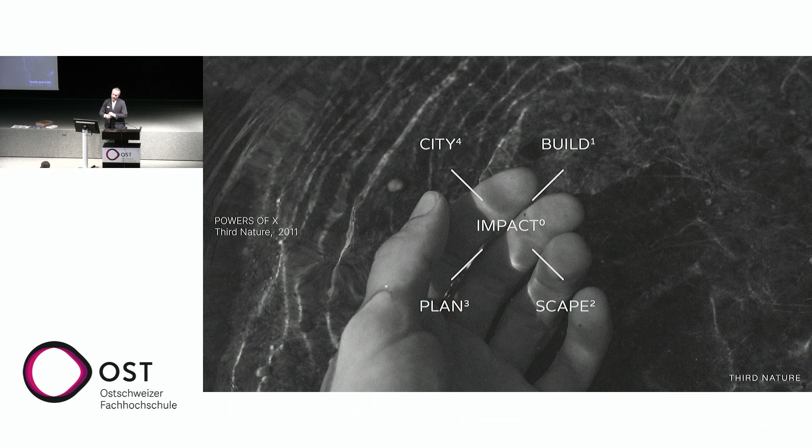This is what we work with in our office. We work with almost all scales of the urban realm, and try to take the prototypes of arbitrary projects, put them together, learn from each sector of work, and put it towards the middle to create more impact. That is our practice - this is the Powers of X, an ambition we founded in 2000, formulated in 2011, and have been fortunate to work with.

In 2011, we founded our office on this project, the Monster Rain event in Copenhagen: 90,000 individual insurance claims, close to 1 billion euros or Swiss currencies.

It was a very bad day for taxis obviously, infrastructure very expensive. But also if you look at the transformative power of this human-accelerated natural phenomenon of too much rain - look at the reflection on the water, all these people standing here gazing upon this phenomenon. Look at the guy who gets to skip work and take his daughter by the hand. So separating good from bad, I think, is very much the balance we try to work with, and the knife edge that we walk on.

If you look at cities traditionally, the classicist city was actually doing pretty well. This is City Hall - you have Tivoli to the right and City Hall to the left. Look at the two guys standing there. I'm going to try this thing just because it's so cool.

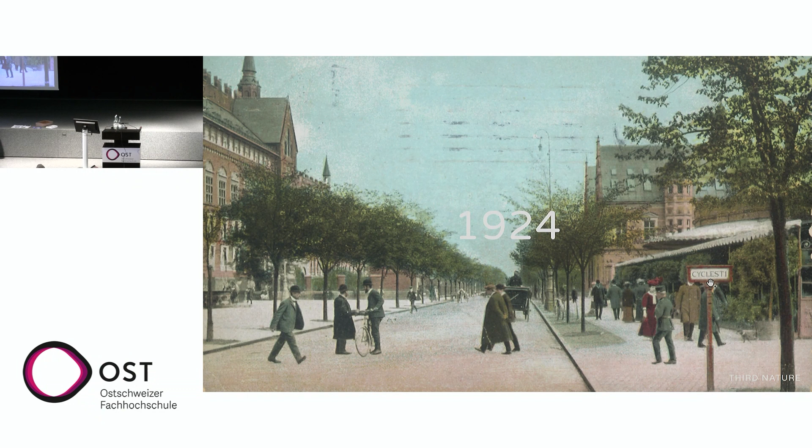Look at these two guys standing in the middle of the street, greeting each other. Here's a sign saying bicycle path. Obviously, this is like the epitome of a classicist livable city. And the exact same spot 100 years later is a complete decimation of all the livable parameters, but also the mobile parameters of this city, this particular place in Copenhagen.

And it's kind of like the guy in the car battling the guy with the bike, now being pedestrianized, just kill me, no, please kill me first. So obviously not a win-win situation anymore between city and nature and space and sort of the classicist traits of a good city. The socio-economic business case is horrible.

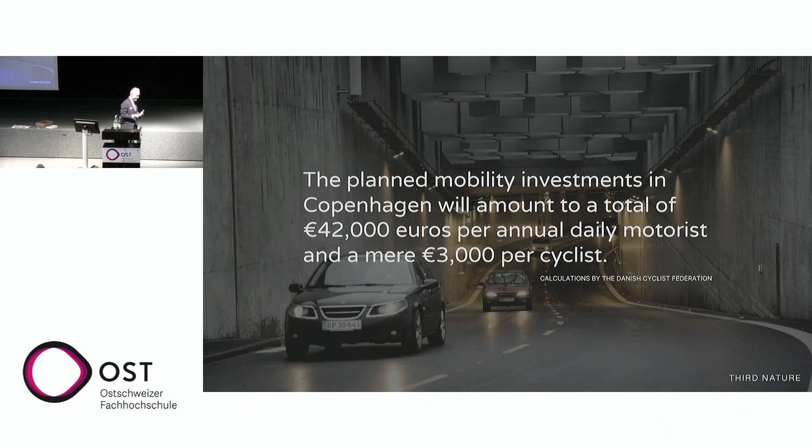We have all the arguments in the world for changing the city. If only facts were enough to change the world, we would be in a better place, as we often joke at the office. Currently, the situation is that we're investing 14 times as much public money into motorized infrastructure as we are into soft mobility. It's completely mindlessly stupid. But that's my personal, but also factual notion on this.

Cities are sticky. Cities are these kind of like metabolistic, strange, artificial sort of phenomenons of relations. And this is just, when Third Nature tried to look at all the data and put it together graphically, it creates this kind of like a Rorschach test of what is actually Copenhagen. It's not just infrastructure, it's not just plots to build on, it's not just the odd park, it's everything. Everything that sort of touches us, touch our life and ability to live.

And how do we look into this equation of strange relations? How do we actually, as planners, as architects, as landscape architects, try to come up with something that performs better than this kind of like mishmash of strange, arbitrary relations? It's so easy to find comfort in what we normally are doing and long-term investments, but we try to somehow, sometimes just, how about just doing a little test?

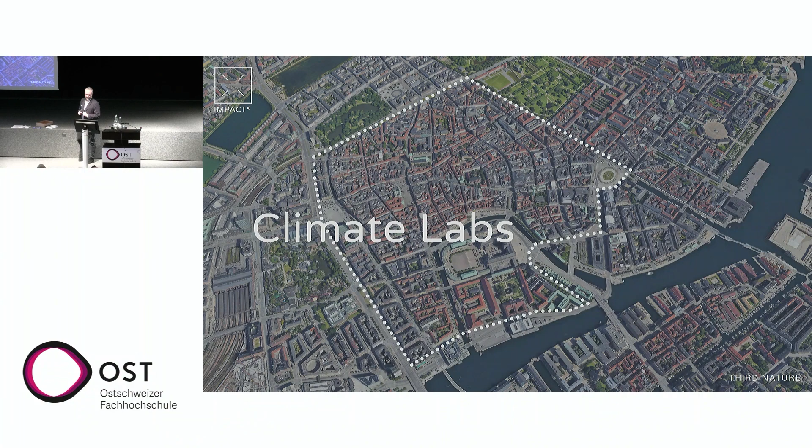This was a little test we did in the medieval city of Copenhagen, the center of Copenhagen. We said, well, how about, just for a summer, we take out a couple of cars, just a couple of parking spaces. I mean, mind you, this city was built 200, 300 years ago. No cars at that time. It's actually okay to try it out.

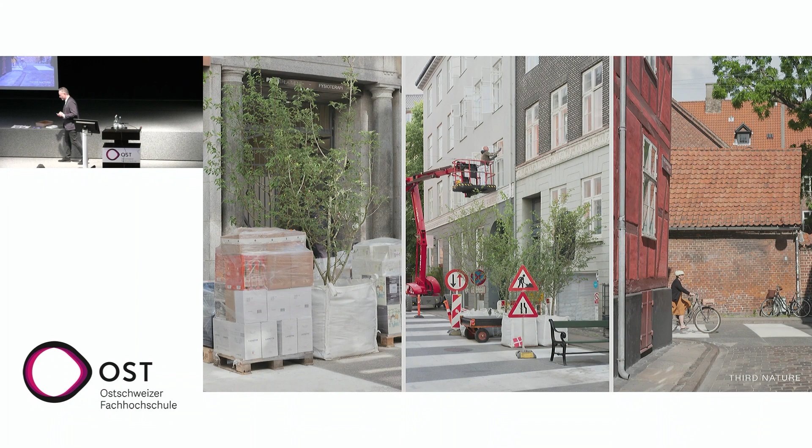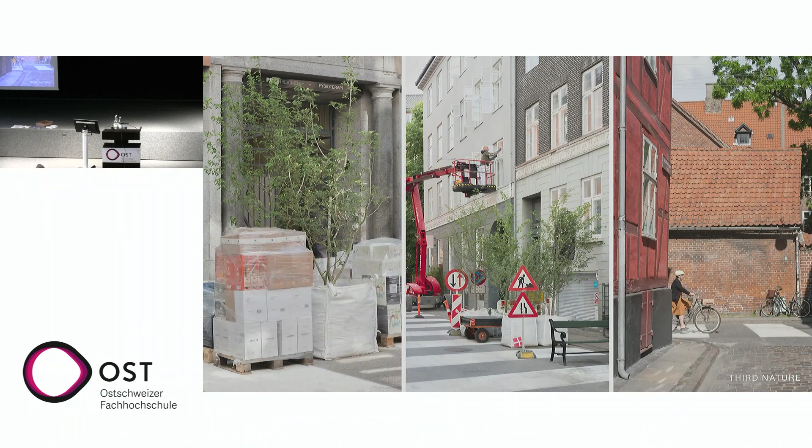So we did, I don't know if you know Lars von Trier, the Danish director, he did this film called Dogville, which is kind of like a theatrical set, you know, the sort of the Beatles cover, obviously. So we did that. So we took out a couple of kilometers of Copenhagen and said, well, how about we just painted something on it to simulate pedestrianization or public space, and then we used some of the parking spots for trees. A very simple project.

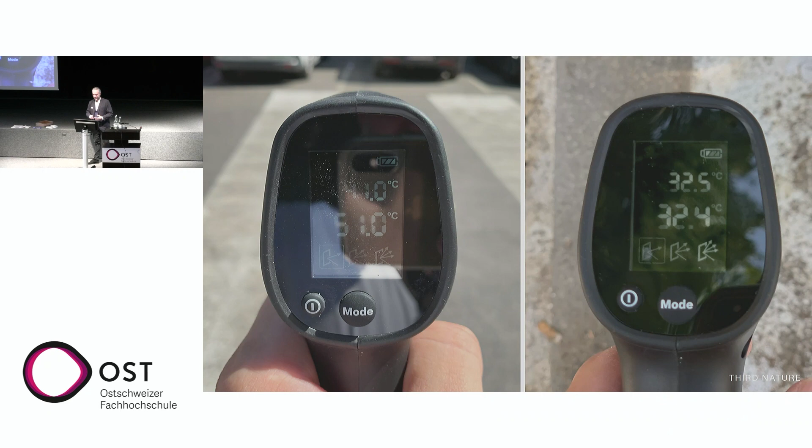I was just one summer, a couple of years ago, measuring it. We had like 20 centigrades of temperature difference from an unshaded dark asphalt surface towards the more white one, which was in shade. So the sort of environmental microclimatic comfort and impact of this simple thing was really, really profound.

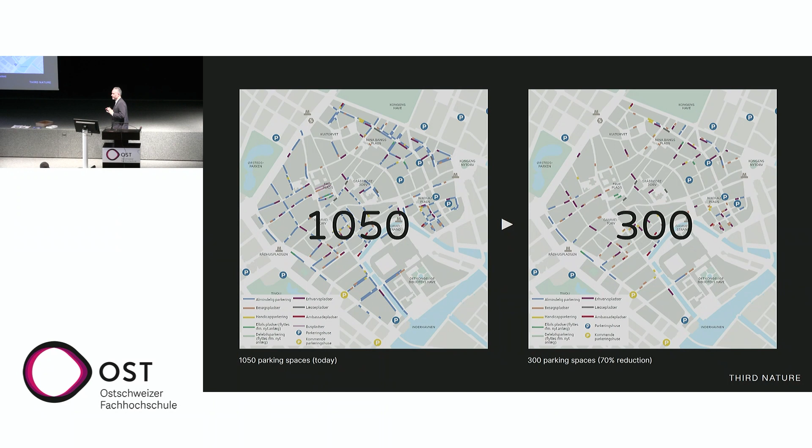And politically, now they have said, well, we're actually going to take away 70% of the parking spaces in this medieval core and try to use it for something else. Something that was completely unimaginable before discussing this particular location in Copenhagen. So I think just sometimes being simple, being a little stupid, but also just let's just try to see what happens actually is a way to go.

Just there is hope on the other side of the parking mafia and the car ownership mafia and the bike mafia and the pedestrianization mafia and the tree hugger mafia. We can all somehow get together and do something nicer that works better for everyone.

But the more permanent installations are also critical to look at. We spent 7 years on this project and realizing all the stuff that goes on underground is just as important as what we look at on the surface. We call it a plug and play project because the plugging does not really relate to the way that we get to play in the city.

We were just out of the first project we did, the climate district, we actually realized that 20% of the streets of Copenhagen does not have any function. If you put stuff together in a more pragmatic way, we actually have 20% of the entire streetscape of the public spaces and the public streets of Copenhagen does not have any dedicated function.

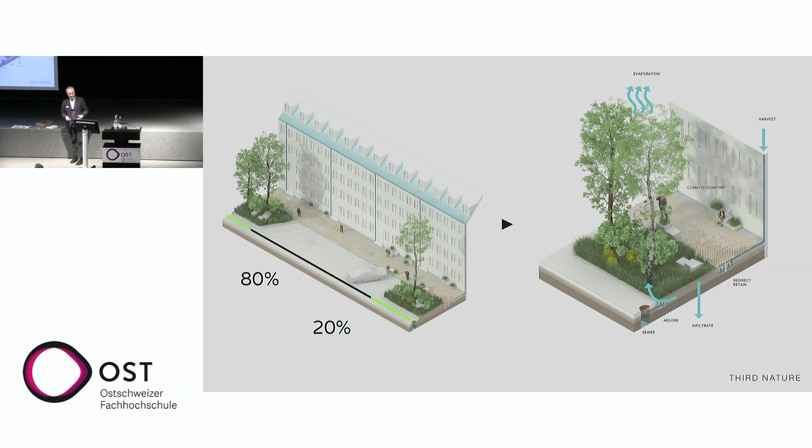This is the concept. The problem fundamentally with flooding in cities is that paving does not do anything with water other than push it away, so it doesn't get into the buildings. But once the sewer system is exhausted—and we have sewers all the way back to the cholera epidemic, still in function in Copenhagen—here, 100 and some years later, they are maxed out in capacity. So now we see water coming on the surface.

So this surface in itself can actually help to provide an additional water management system. And people tell us how much water they need to manage, and we tell them how many trees they need.

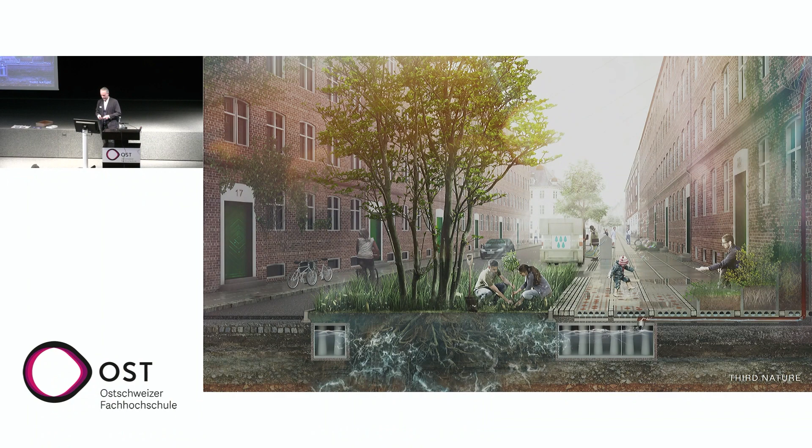So we use our product to accelerate the greenification or naturalization of the streets, to promote more and better streets, more green and more social, high-capacity streets. This is the average street of Copenhagen. This is where we actually spend 80% of our daily free time, and it's basically a parking lot.

We'd like to think that I'd like to live centrally in Copenhagen, next to the Royal Theatre and these kind of things, but I never go. I don't go to the Royal Park, I don't go to the Royal Theatre. This is actually the space I get to spend most of my hours, 3 hours, with my kids. Parking lots.

We call it the philosophy of the edge zone, and the edge zone is actually a formulated target of design when we do cities in Copenhagen. We spent 5 years designing this concept and this product. It took 5 hours to put in these trees.

And literally 5 minutes after we cut the ribbon of this product, people were just responding so positively to it. We had one person—I can see I'm never going to make all my slides because I'm just too anecdotal today, but that's okay. One person lives on the first floor, and suddenly her view was taken away by the big trees.

So I thought, she's going to be pissed because now she has no view. But she was actually a night nurse, so she came home that afternoon and just looked at it, and she was so happy. Normally she would have to go to bed because she had a job the next night, but she was just standing for hours on the balcony, super happy that her non-place of an environment had suddenly become some place, and she was really responding well to it.

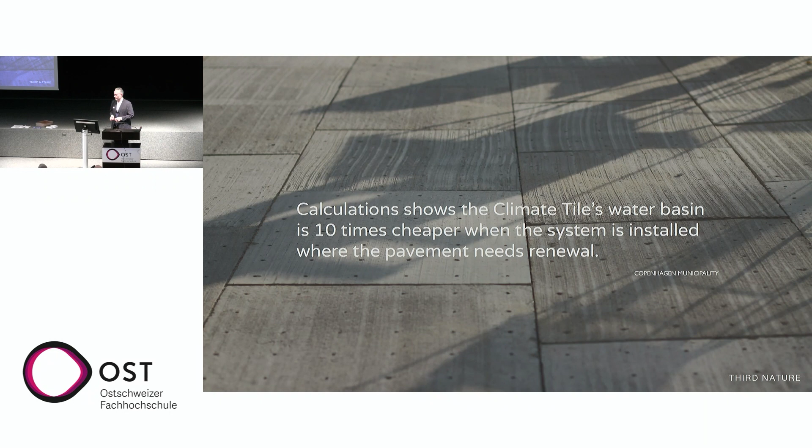Because all the other places are hypothetical, insanely expensive places that are not currently available in the denser cities, that's actually what we are looking at. If you work with simultaneous hybrid products like this, you can actually have a vast socioeconomic impact, and also make something useful over time.

This is when we are retrofitting, looking a little more at the permanent larger plans of Copenhagen. This is another district we've been working with for some years. It's a kilometer-long project, and this is much more extravagant in terms of livability. The edge zone design finds the balance between a hyper-public biking and promenading corridor throughout the heart of this project, with privatized row house ownership on the ground floor.

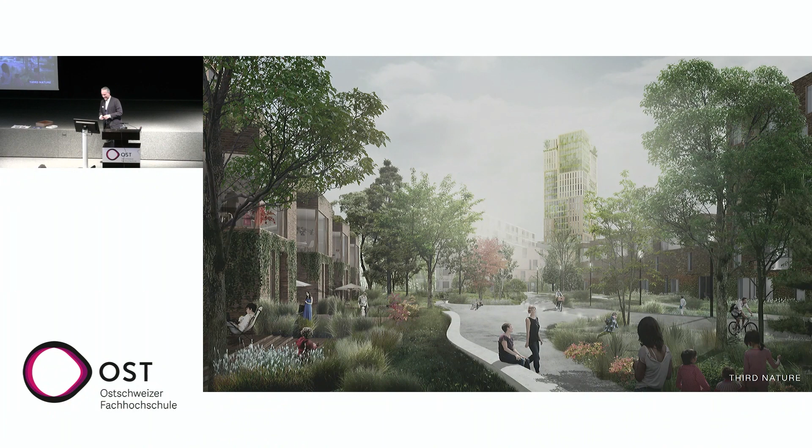By using landscape and meandering the different levels and densities of plantation, we create something that plays nice, so you can live here but also have this super public situation. And magically, we disappeared the cars in this project by having a basement underneath everything - more than 1 kilometer of basement for just cars. But you get a sense of actually living in a car-free city.

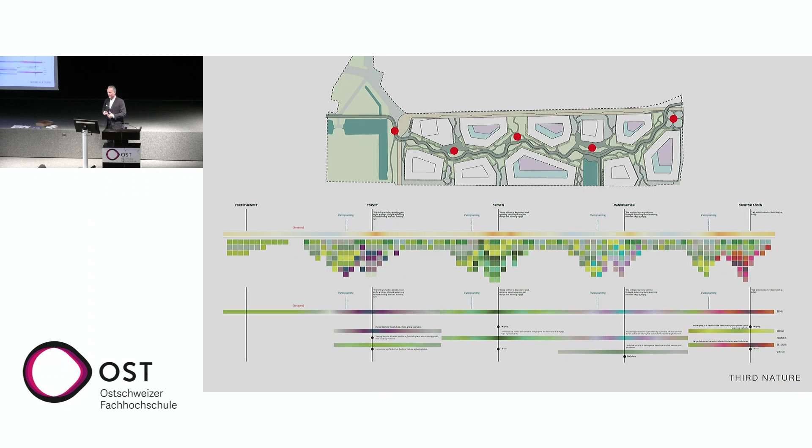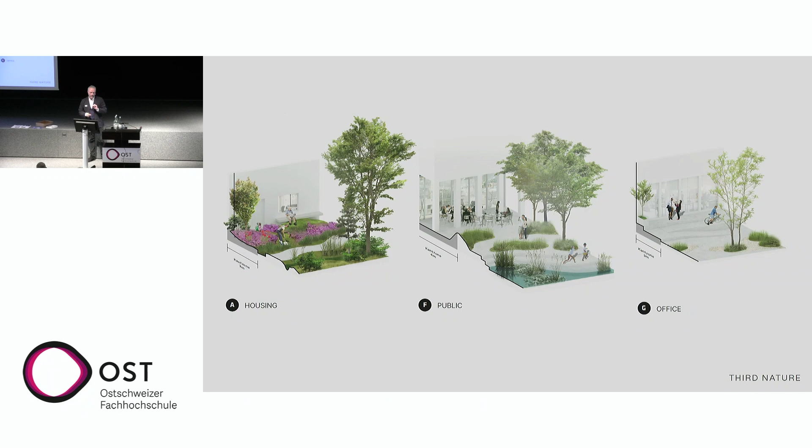A lot of planning, a lot of regulations has to be massaged together. But what we've tried to do is make this corridor a hybrid between plantations, seasons, public use, destinations, sports activities - all kinds of performative parameters put together. All kinds of specific details and regulations on how the lowest 7 meters of this entire environment are put together into this type of design.

Where you have a bicycle lane in the middle, and the bicycle mafia of Copenhagen was not happy with this bicycle path - it's too meandering, it needs to go faster, it needs to be more straight. And I'm just like, well, you can just piss off to the next plot and go fast on your bike, because this is about slowing down and becoming a more agreeable relationship with each other.

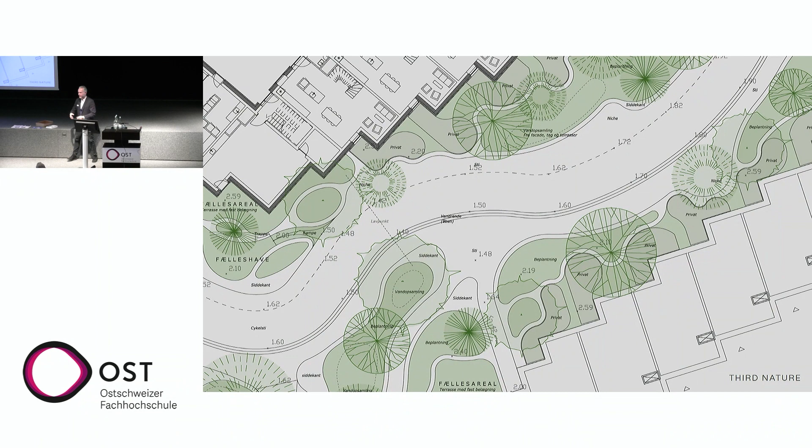And everything in the landscape design here is super meandering. This is about creating a more performative, facilitating landscape that responds well to us and our need to find a nice place to sit in the sun, or in the winter sit in the shade. It's a much more humane, performative type of approach to landscape.

And this is the first bit of it - this is September afternoon, actually have sun. Everything is optimized with sun parametrics, so we know where people can stay in the afternoon once they're free from work, and you can have something in this dense urban area where you can stay and enjoy your life. And the client really micromanages the landscape, so it's working really well.

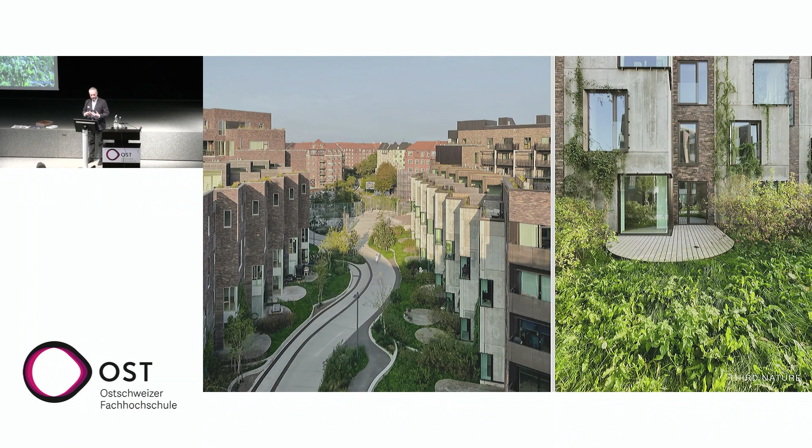It just grows - this is after 2 years, from nothing to something that accumulates growth value over time. It's really a living, vibrant environment, and the density of it is probably double the density of what is normally considered the scale of Copenhagen.

Looking at water and the types of pressure we have on the more iconic destinations of Copenhagen - this park is a cultural heritage park in Copenhagen. It's on Vesterbro, which is one of the densest, classicist neighborhoods of Copenhagen. The park has 1 million annual visitors before we transformed it, and they wanted to use it as a main recipient for this entire large area - all the water that lands there in an extreme situation has to somehow go into that park.

So that was the design task we were given: it's cultural heritage, we have 1 million annual visitors, they all love the park so don't change the thing, and by the way, fit in a massive amount of water. That was the task. These types of sticky situations any historical city on this planet will face sooner or later, and you might as well just get going and see what's actually the capacity of your historical environment.

This park has some pavilions at the end, and a stage here done by Arne Jacobsen.

You might know Arne Jacobsen is one of the great Danish functionalists. So it's pretty daunting being, at the time, a younger architect. I wouldn't say I was young, but I was younger.

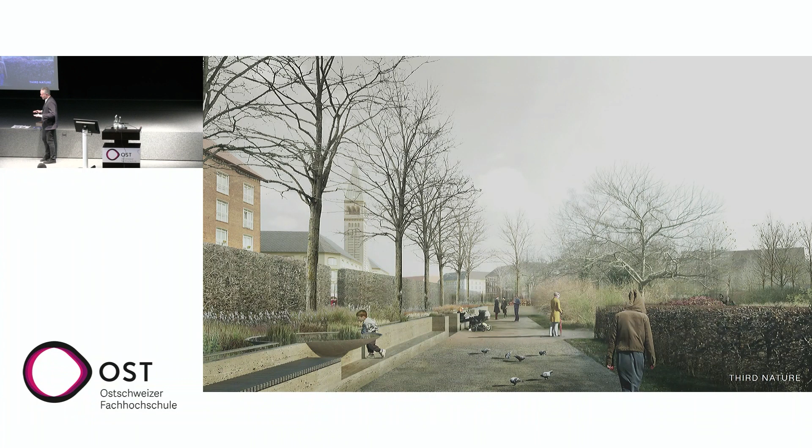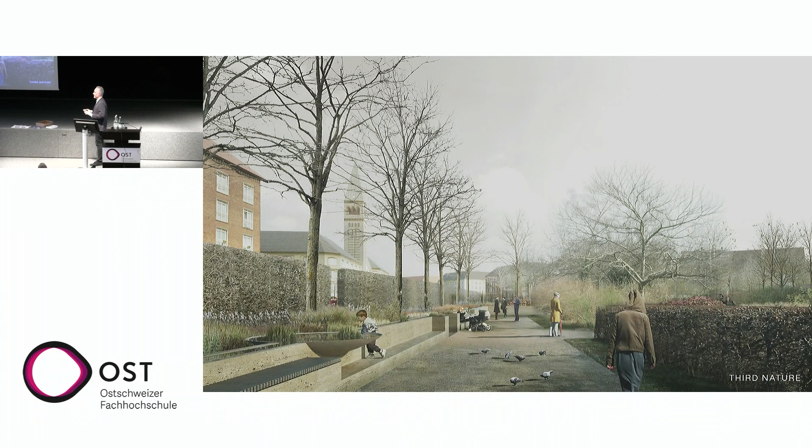So we came up with a strategy and said, well, what if we could imagine a flooding of the entire park? So we came up with the idea of building a wall. We point-founded it, so we didn't even touch the trees. We just put it on the perimeter of the park, trying to say in the competition, well, maybe if we can imagine this entire park being flooded, it can actually take a lot of water.

This is a 100-year event, which doesn't really make sense since we have 1,000-year events every 3 years in Copenhagen. But so, 35,000 square meters of controlled flooding of a historical park.

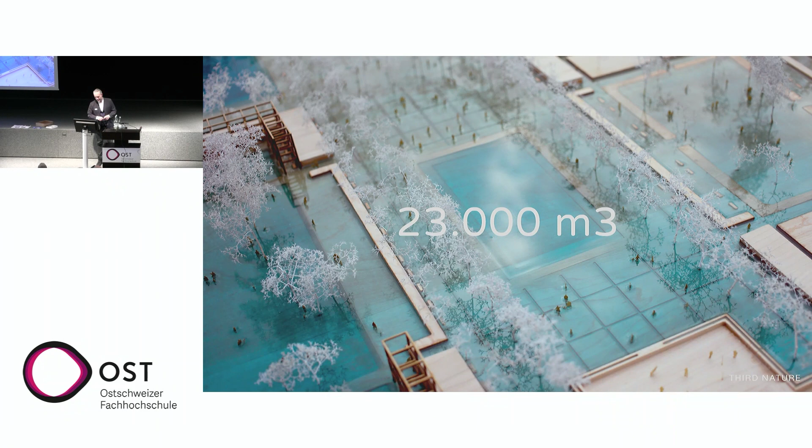People will bathe in it. I can only advise against it. But people respond really well to these types of situations. They just see it as something playful, but it is actually kind of catastrophic. We have capacity of 23,000 cubic meters in the historical park, which, to my knowledge, is second to none.

We preserved so much of the original plantation and the iconic elements. We strengthened the neoclassicist element of the park. And we built walls to preserve Arne Jacobsen's gems of architecture.

This is a flower stall, like a small shed done by Arne Jacobsen, at an insanely high price per square meter. And it does not get wet. And we did this, the sports facility, so this is done almost like a classicist theater.

We have 2 million liters of capacity of the cleanest fraction of rainwater that's been harvested in the park. And just in the first year, we saved 6 million liters of groundwater just by using rain for irrigation in Copenhagen.

The whole design ethos of this project is, somehow through a twisted, more contemporary take on neoclassicism, that architecture makes carbon emission and climate change tangible on a daily basis. It's not a lifted finger, but it's also not a 'yes we can.' It's more like involving climate as a daily revolving discussion with all the users of the park and the millions of annual visits to the park.

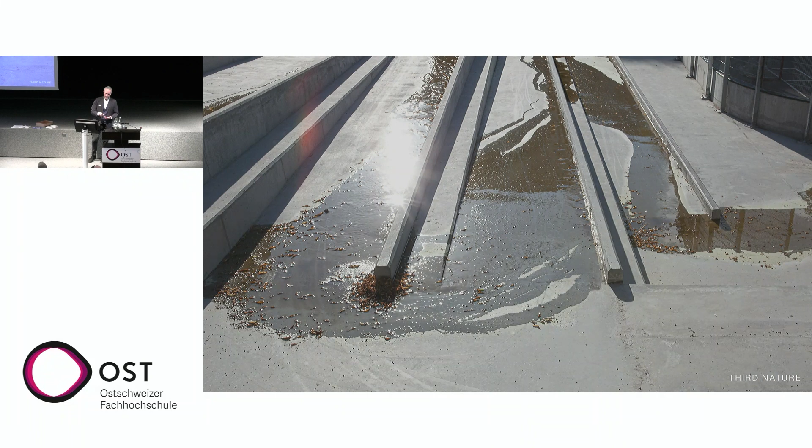How am I doing on time? Too slow. I'm going to skip this project just to get to the big nasty one. Yeah, I promised Annette I'd show her so she could grill me afterwards.

This project is kind of like a Kindereier, like a Columbus egg, they call it. It's about flooding protection. It's about surplus soil in the capital region. It's about urban development, money, densification of Copenhagen, and it's about infrastructure.

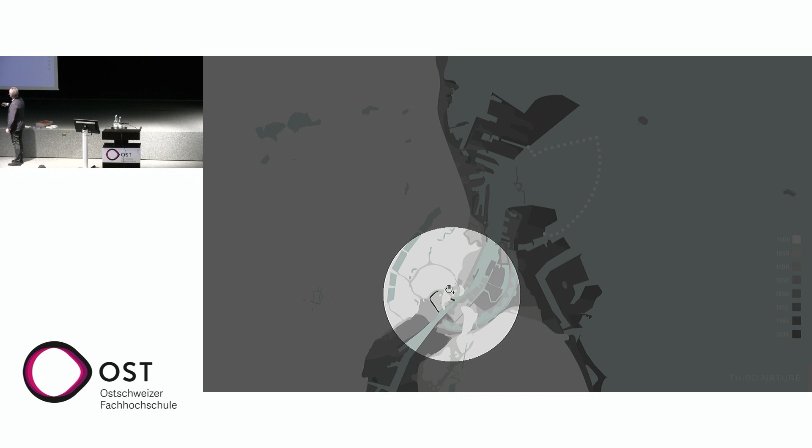The problem with Copenhagen is that we are very much exposed to the sea. Once we have sea rise and extreme wind, we see a risk of Copenhagen being flooded by the sea. This is the historical core of Copenhagen—let's see if I can, oh sorry, too many buttons, three is too many. This is where we have the parliament today.

So just to say that we are very much in a sticky situation. This is the current design of the park, the flooding park, the green stretch on the outside. And everything else is currently just a soil depot, but will eventually be 2.7 million square meters of new real estate in central Copenhagen.

I just looked it up. We're expecting 77.8 million tons of soil to be placed in this island.

You might ask, isn't it extravagant building an island of this size? Getting all that soil, isn't that crazy? But it's the other way around. This is the amount of soil we need to replace because of the urban development of the capital region. So rather than pushing the soil 50 kilometers outside of Copenhagen, we actually just push it into the center of Copenhagen, with a massive climate mitigative impact on emissions.

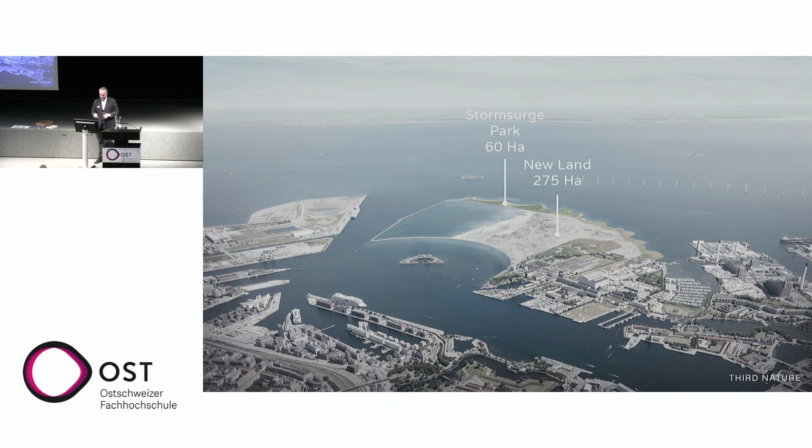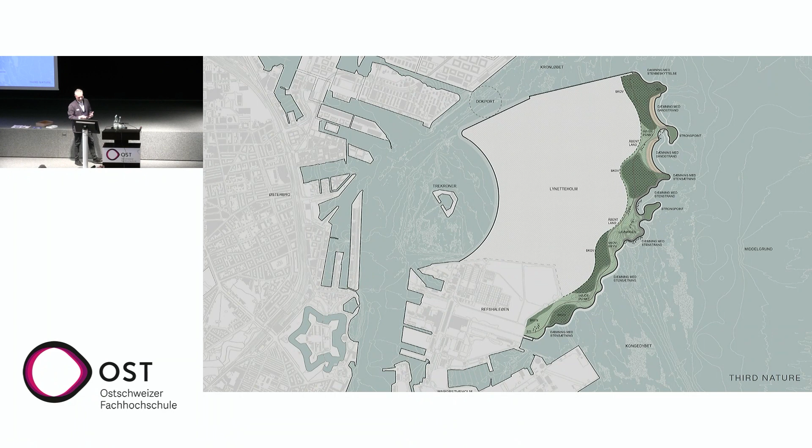The storm surge park is what we've designed currently, the meandering path or line towards the sea on the east. Everything is based on the movement of water and sedimentation and the seabed topography. So everything is a natural response or artificial response to a natural phenomenon.

We work with this design on this edge, what we call a reflective edge. Normally when you have a harbor, its edges are like this, and if you have more flooding and more damaging wave impact, you just elevate it. But the problem with that strategy is that you have to come up maybe even plus 4, plus 5 meters in all the historical quays of Copenhagen. We have 42 kilometers of quays just in Copenhagen.

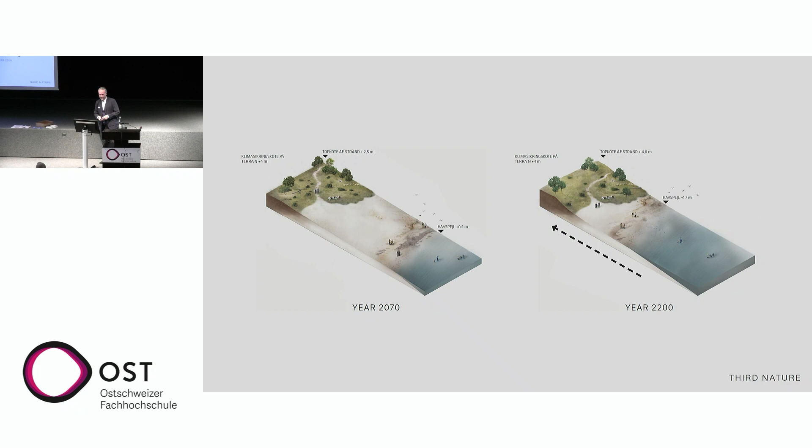What we devised here is what we call a nature-based approach. It's actually an absorbing type of coastline or edge towards the sea. So when the big storm surge flooding and waves come, they are being absorbed and mitigated by a more meandering terrain. And this provides for a lower high point of the design. So even though it's constructed, it's actually learning from nature, and how nature would do this in a way we can use recreatively and be more agreeable with the situation we have in relation to the sea, and how we can use this project to reformulate that.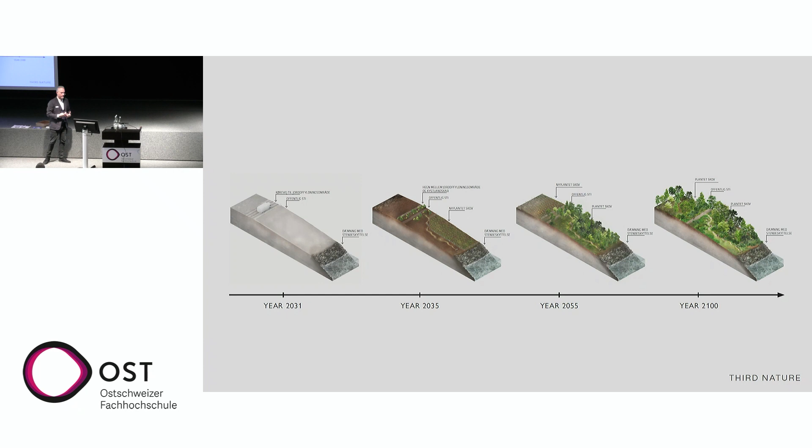The cattle are therefore accelerating the build-up of nutrients in the soil. They're actually enhancers and accelerators of natural processes. No condos - this will be a public park indefinitely. No building in this zone.